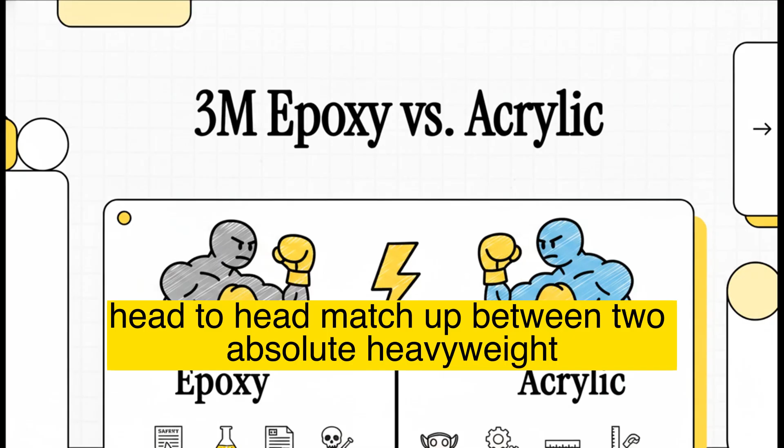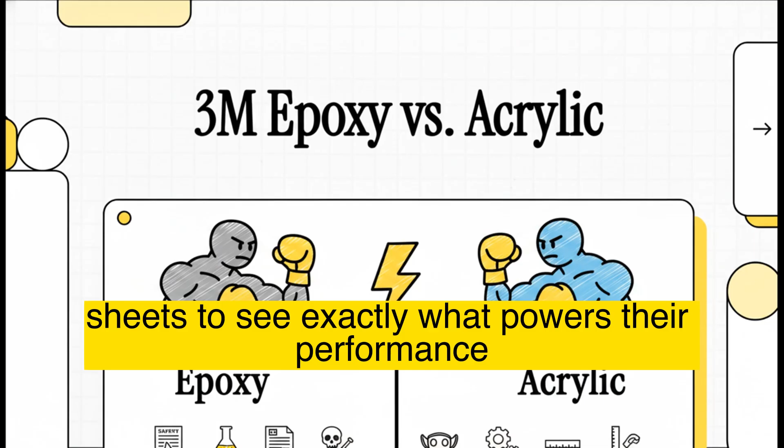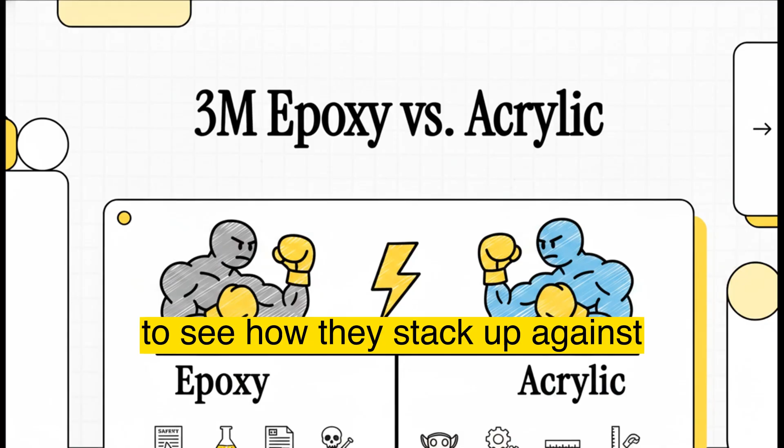Welcome to today's Explainer. We are setting the stage for a real head-to-head matchup between two absolute heavyweight industrial structural adhesives from 3M. We're going to be dissecting their safety data and spec sheets to see exactly what powers their performance. Specifically, we'll be comparing their fundamental chemical compositions, their curing mechanisms, diving deep into their technical specs, and looking closely at their water resistance to see how they stack up against strict product waterproofing standards.

So let me ask you this. Are you losing assembly line speed to slow curing adhesives? Or, maybe worse, are you struggling with joint failures when your products actually get out there and face extreme real-world environments? If you're looking to optimize both your manufacturing speed and your structural durability, well, this analysis is exactly what you need. Let's go ahead and meet our contenders.

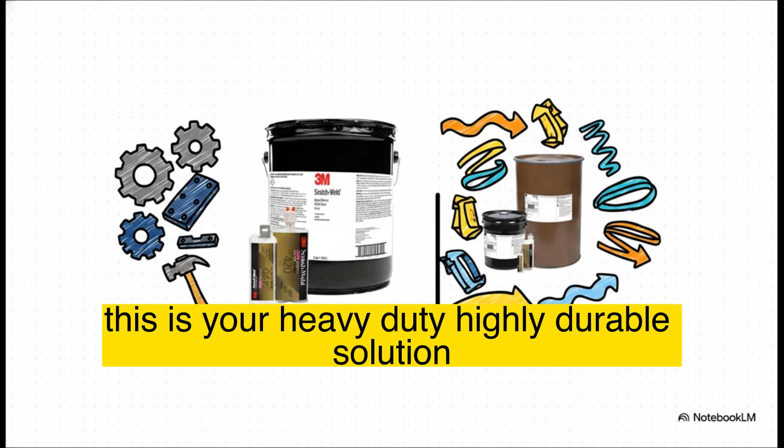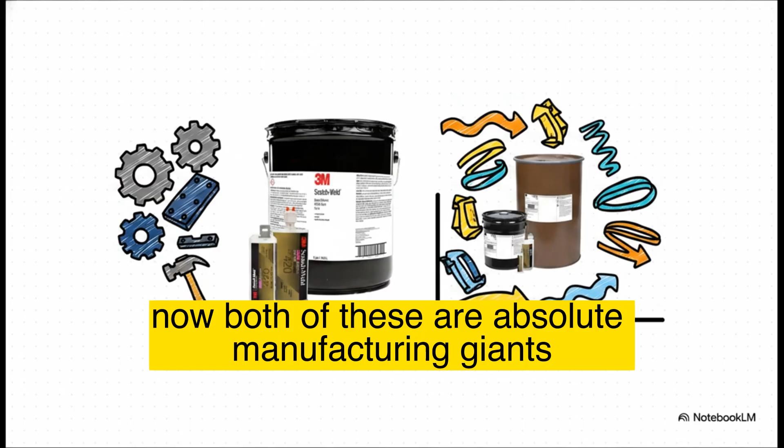In the black cartridge, we've got the 3M DP420NS Epoxy. This is your heavy-duty, highly durable solution. And in the gray container, we have the 3M DP8507NS Acrylic, which is really known for its speed and resilience. Now, both of these are absolute manufacturing giants, but they are built for entirely different missions.

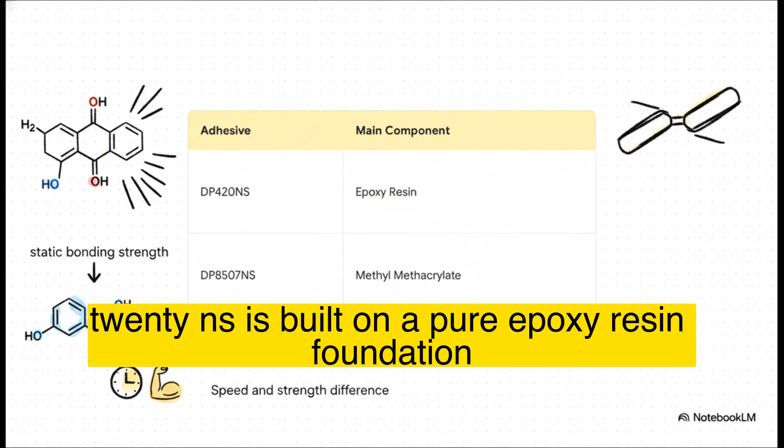Round 1. Chemical composition. Pulling the chemical breakdown directly from 3M's own safety data sheets reveals their core differences. The DP420NS is built on a pure epoxy resin foundation, specifically CAS 25068-38-6 for those keeping track, and that is the absolute bedrock for massive static bonding strength.

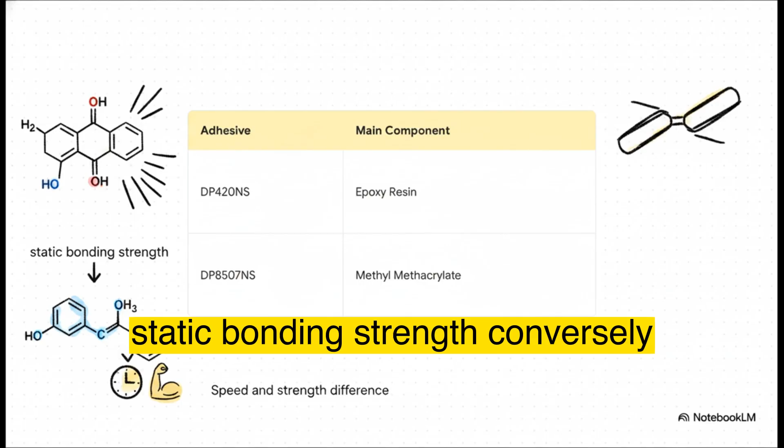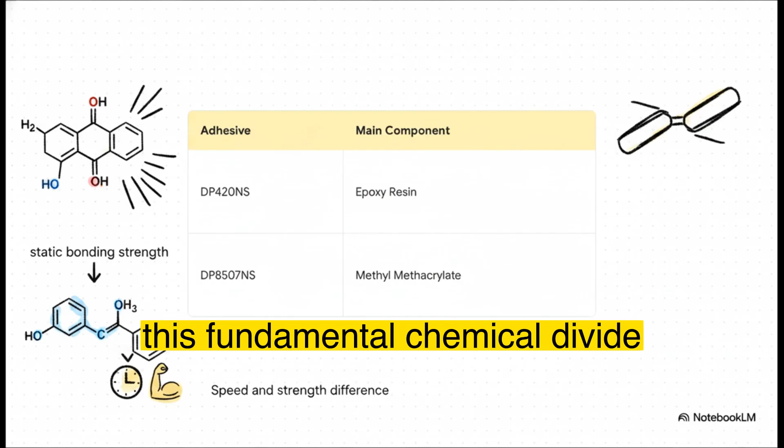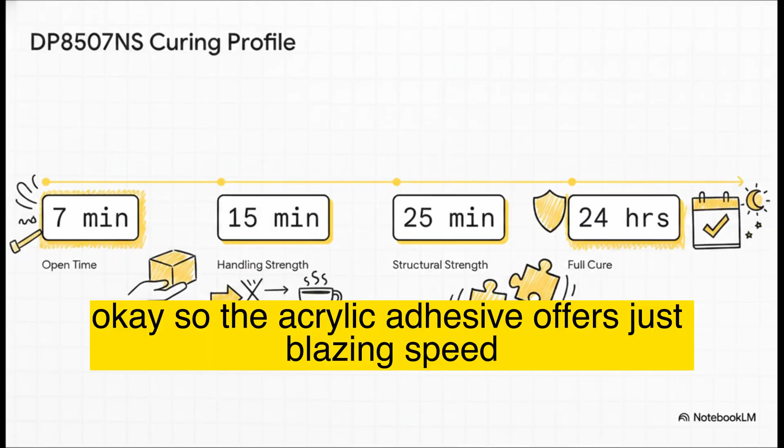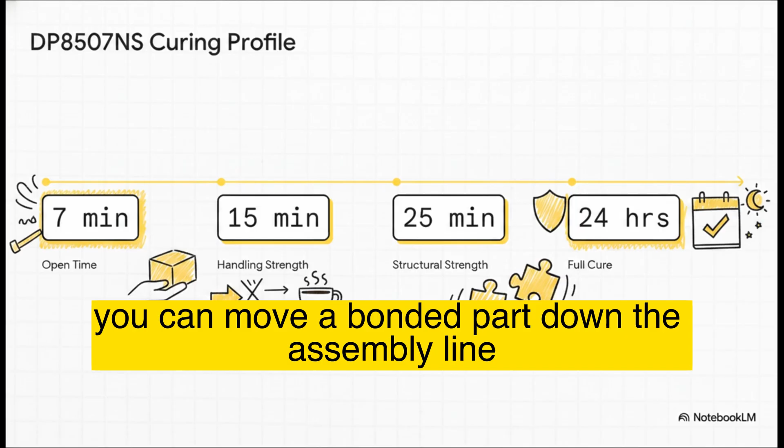Round 2. Curing mechanisms. Okay, so the acrylic adhesive offers just blazing speed. You get a really tight 7 minutes of open time to work, but here's the kicker. It hits handling strength in just 15 minutes. In the real world, that means you can move a bonded part down the assembly line literally before your morning coffee gets cold. And full structural strength, that follows in just 25 minutes.

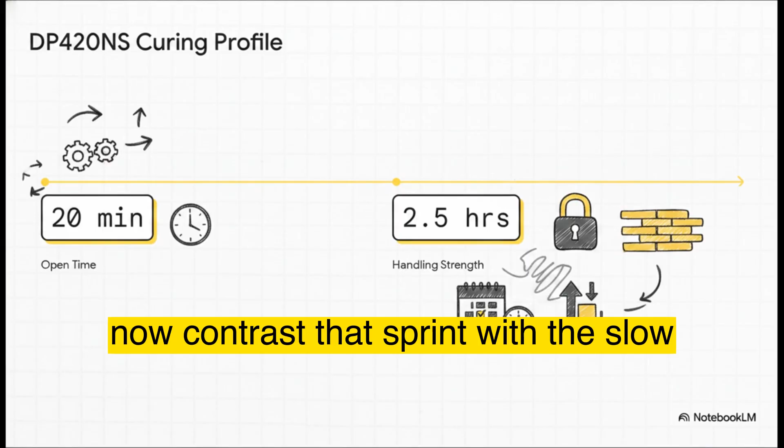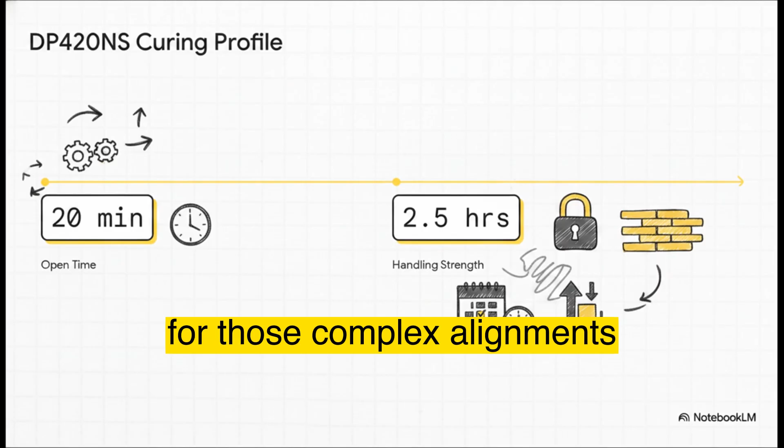Now, contrast that sprint with the slow, steady curing profile of the DP420NS epoxy. It gives you a very comfortable 20 minutes of open time for those complex alignments. However, reaching handling strength takes a full 2.5 hours. If you bond it in the morning, you're waiting until after lunch to safely move it. It basically trades speed for ultimate solidity.

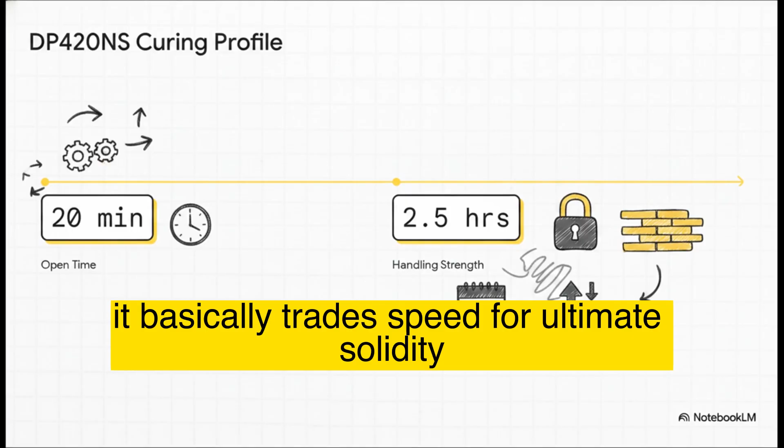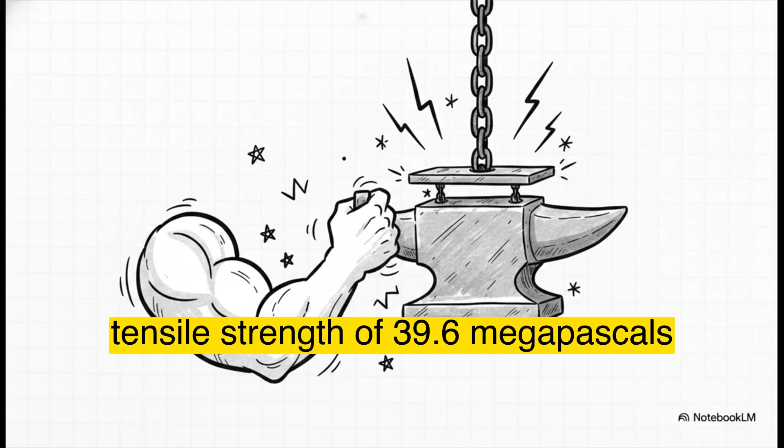Round 3. Technical parameters. So does that 2.5-hour wait actually pay off? Oh, absolutely it does. If your application demands extreme load-bearing, the epoxy is a total monster. It boasts a massive tensile strength of 39.6 megapascals. To put that into perspective, you're talking about thousands of pounds of force per square inch. It also has an overlap shear strength on cold-rolled steel of 23.7 megapascals. These are numbers for creating near unbreakable static bonds.

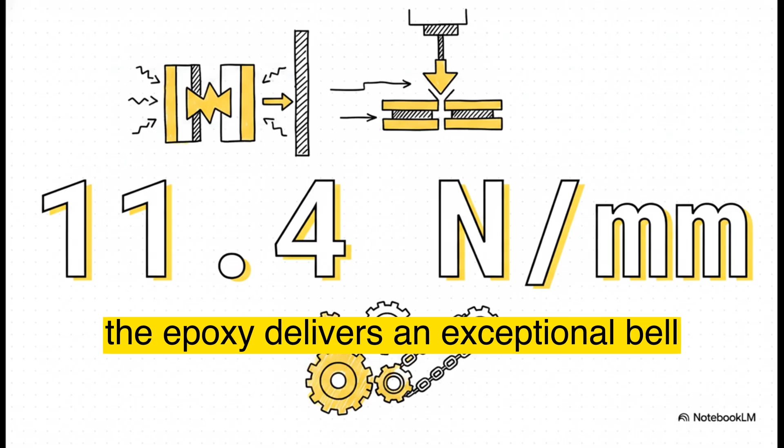Furthermore, the epoxy delivers an exceptional bell peel strength of 11.4 newtons per millimeter. What that actually means for us is that it has an incredibly high resistance to tearing or peeling forces. Basically, once it grabs on, it stays locked.

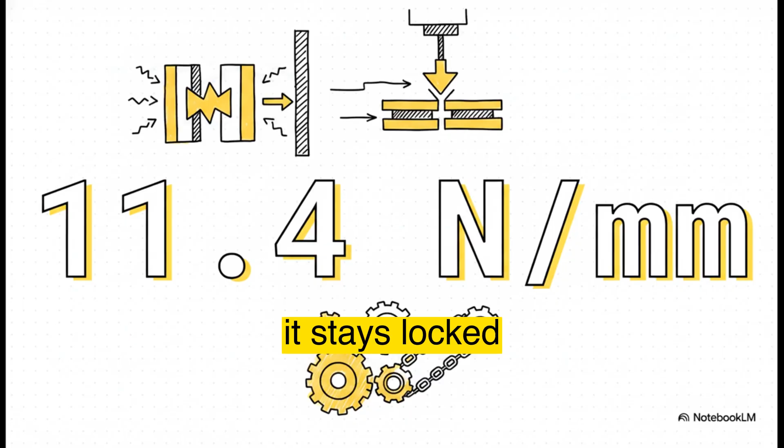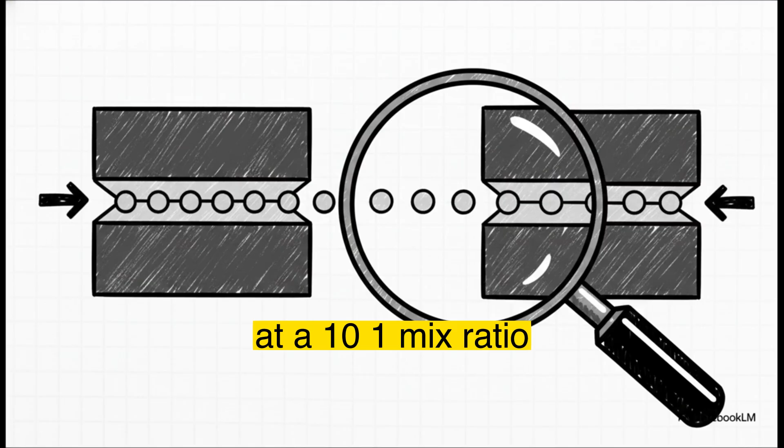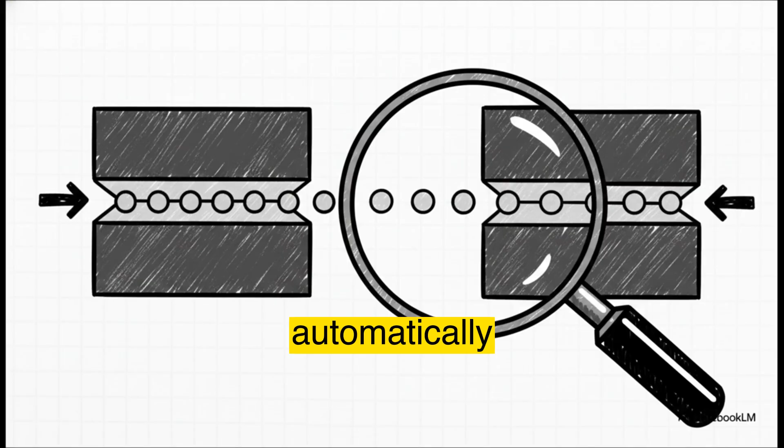So how exactly does the acrylic compete with that? Well, it balances its rapid cure with a toughened formulation at a 10:1 mix ratio. But honestly, the most brilliant engineering detail here, it incorporates microscopic ceramic particles. These little guys act like tiny spacers, automatically controlling the perfect bond line thickness when you press two surfaces together. It's a highly refined design, for sure.

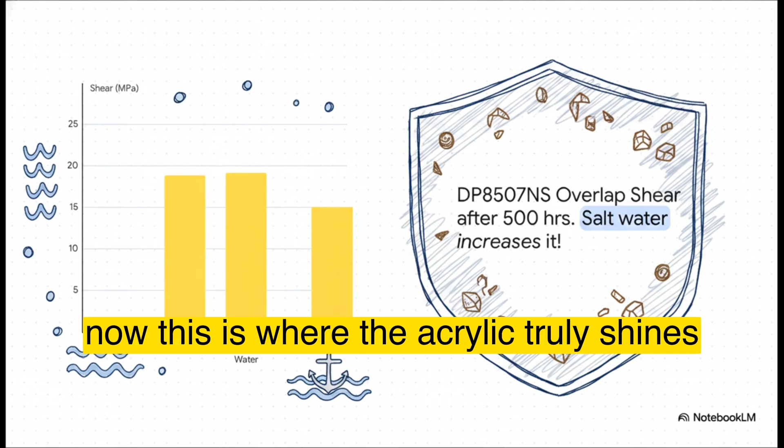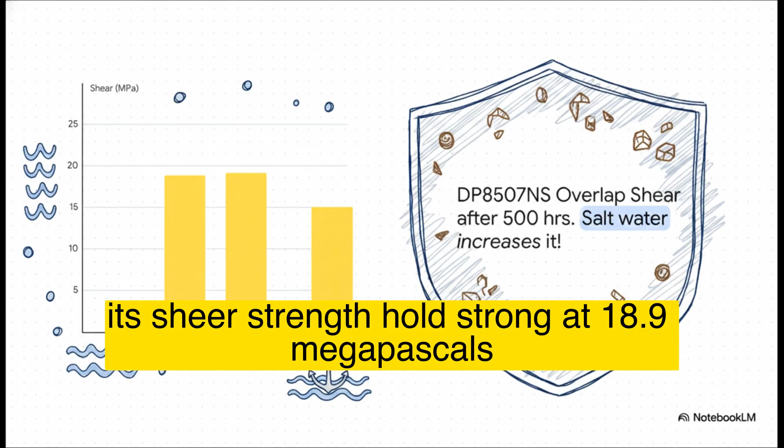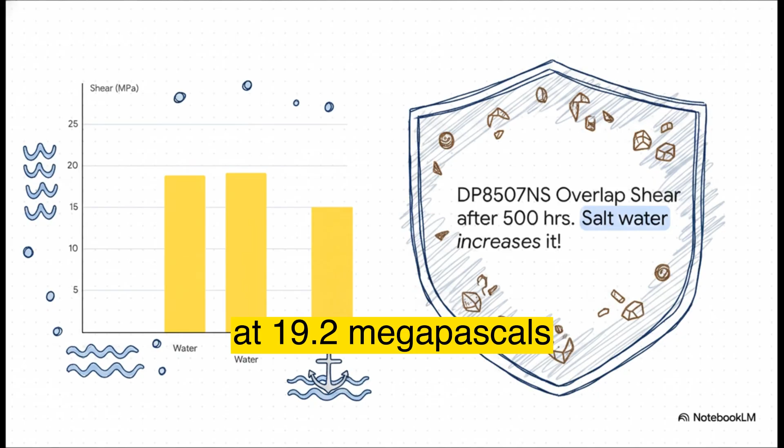Round 4. Water and environmental resistance. Now, this is where the acrylic truly shines, especially for products that need to meet strict waterproofing standards. After 500 solid hours submerged in pure water, its shear strength holds strong at 18.9 megapascals. But incredibly, when it's soaked in a highly corrosive 5% saltwater solution, its strength actually measures slightly higher at 19.2 megapascals. Its water and salt resistance is just extraordinary for waterproof applications.

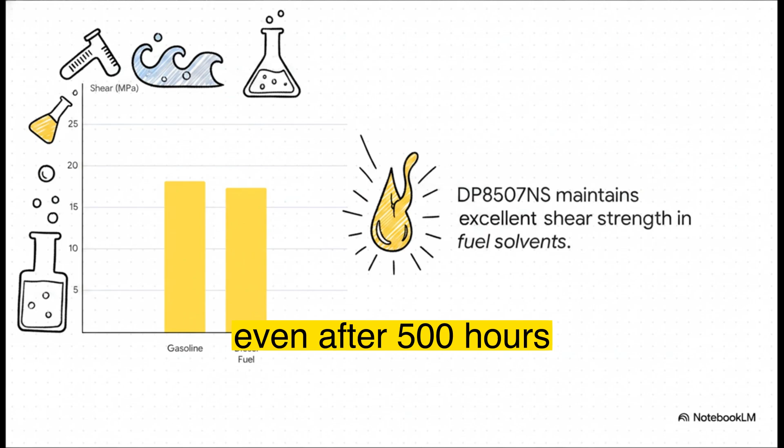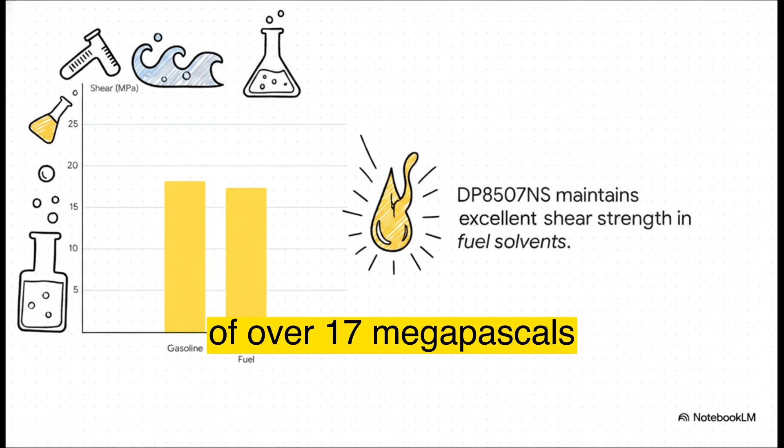And that resilience, it extends right into harsh chemicals too. Even after 500 hours completely submerged in gasoline or diesel fuel, the DP8507NS acrylic maintains an impressive shear strength of over 17 megapascals. It barely degrades at all in heavy fuel solvents.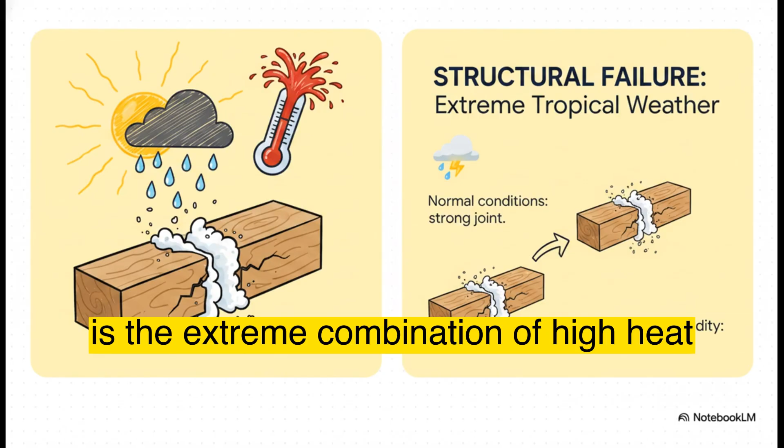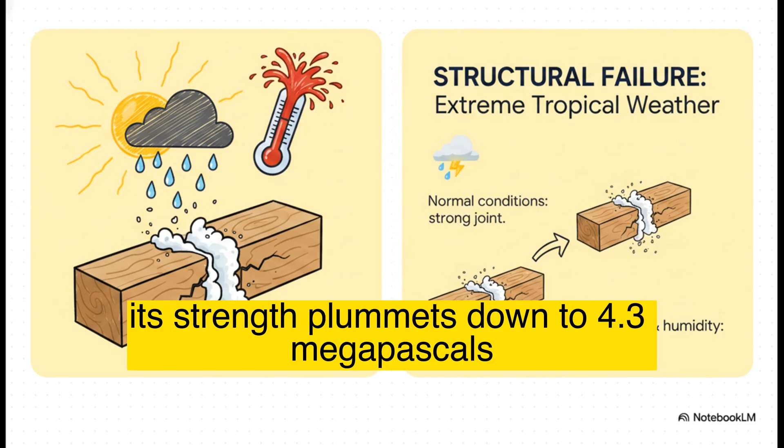But, an objective analysis means we have to point out limitations. The Achilles heel of this acrylic is the extreme combination of high heat and high humidity. When it's baked at 85 degrees Celsius alongside 85% relative humidity, its strength plummets down to 4.3 megapascals. So constant tropical-grade heat applications, those are going to require some careful consideration.

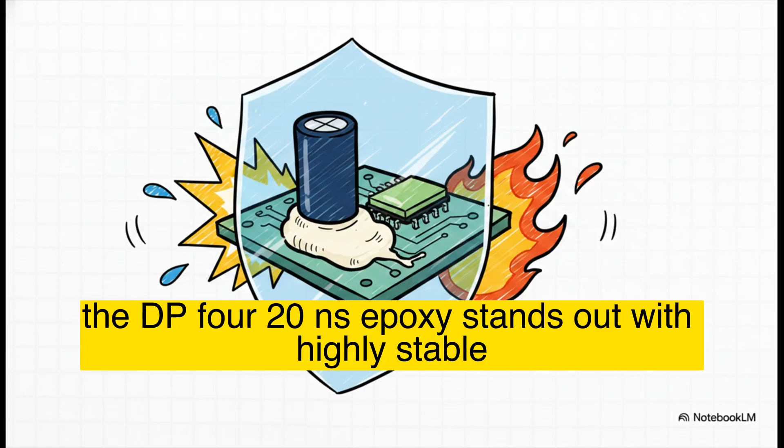Conversely, the DP420NS epoxy stands out with highly stable overall environmental resistance. It completely avoids those drastic drops under combined heat and humidity. Plus, it carries the prestigious UL94HB certification, which proves its material safety and flame retardancy, a really crucial standard if you're working in electronics and appliances.

So what does this all mean? Well, that concludes our breakdown, and it ultimately comes down to a calculated trade-off. Do you choose the blazing speed, chemical survival, and water resistance of the acrylic to accelerate your line and meet strict waterproofing standards? Or do you rely on the massive physical strength, stability, and flame-retardant safety of the epoxy? The right choice depends entirely on what you are building next.

So, which adhesive is going to build your next product?